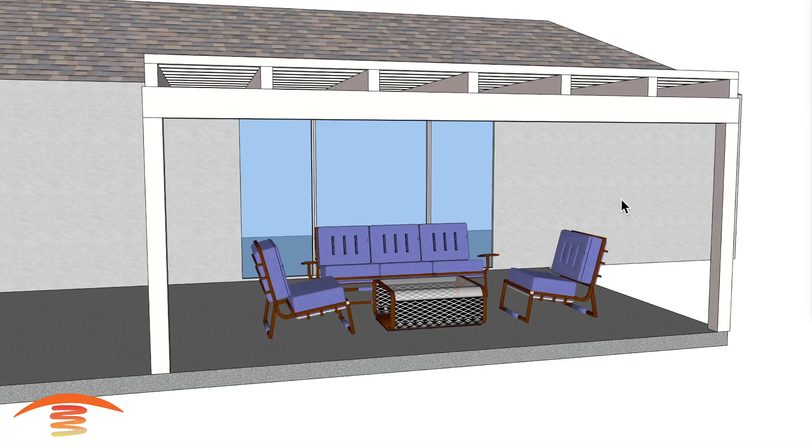Now let's get heating. All right, so here we have this residential patio with the covered deck area here. Let's go right into the overall dimensions. So overall dimensions, I have at inside edge to inside edge of post, 18 feet.

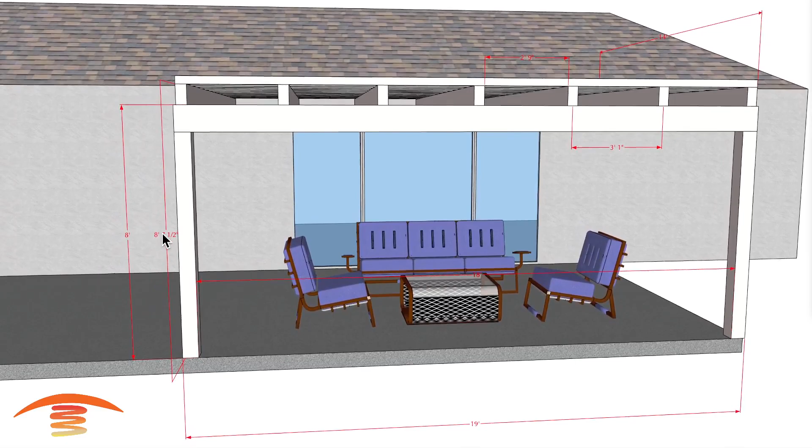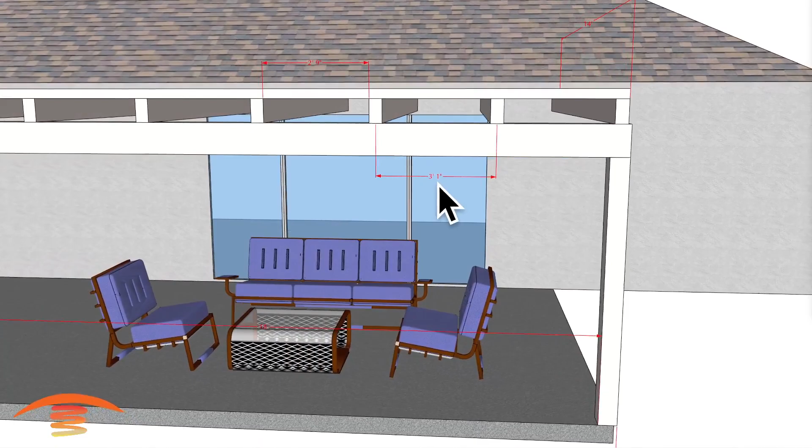I have a height of the beam going across here at 8 feet off the finished floor, and then the top edge of these cross beams at 8 foot 7.5. I have 33 inches of space between these beams, or 2 foot 9 inches, and we have a 14-foot depth of the patio structure itself from here to the residence structure, and then 3 feet 1 inch center to center on these cross beams.

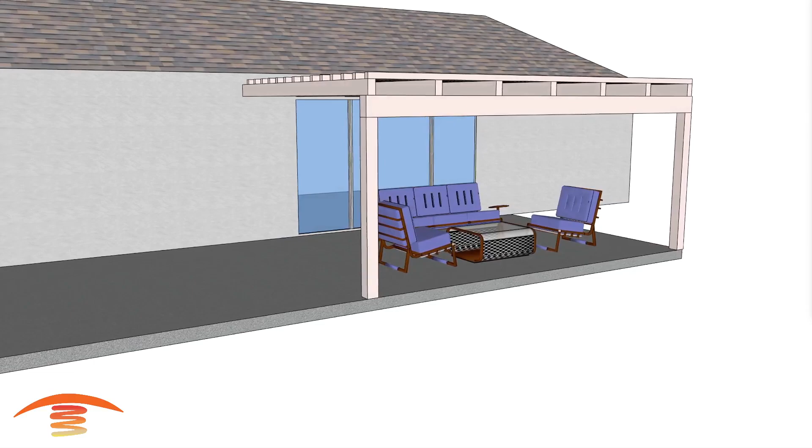I think that's about it as far as the details are concerned. So let's go into a couple of the recommendations that I might have. I'm going to first show you using two SlimLine 4,000 watt units mounted between the beams, and these are pointed straight down to the ground.

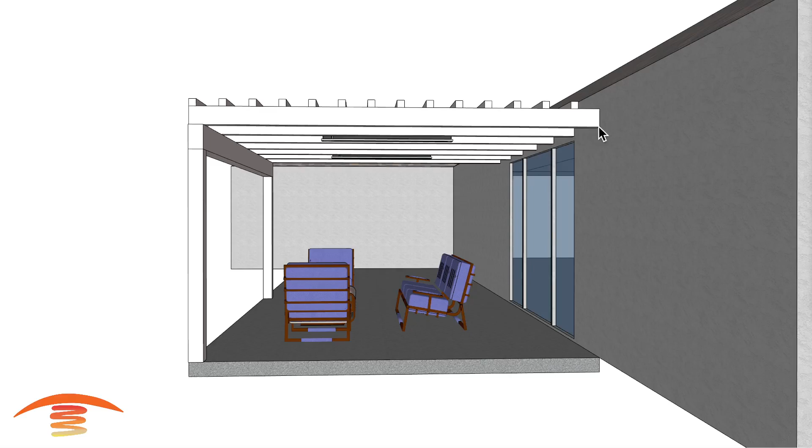So they are centered within the patio structure from this point here to this point here, and pointed straight down to the ground. Now the distance apart from each other, I'm going to show this, it's going to have some more information, but let's go ahead and put that on here. So the distance I have is 9 feet 3 inches center to center on the brackets.

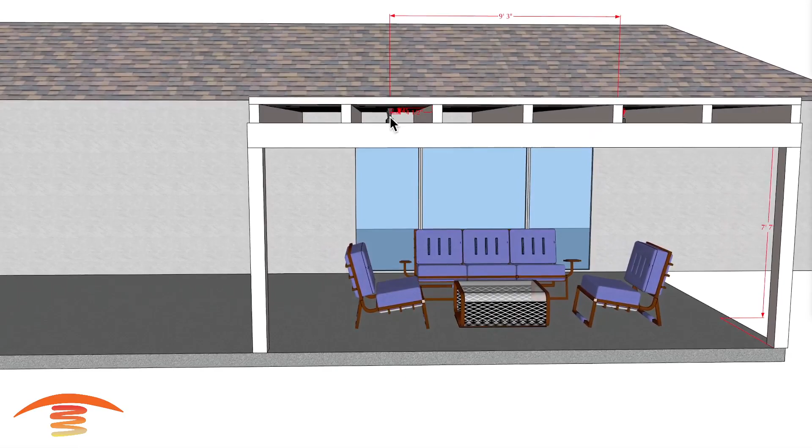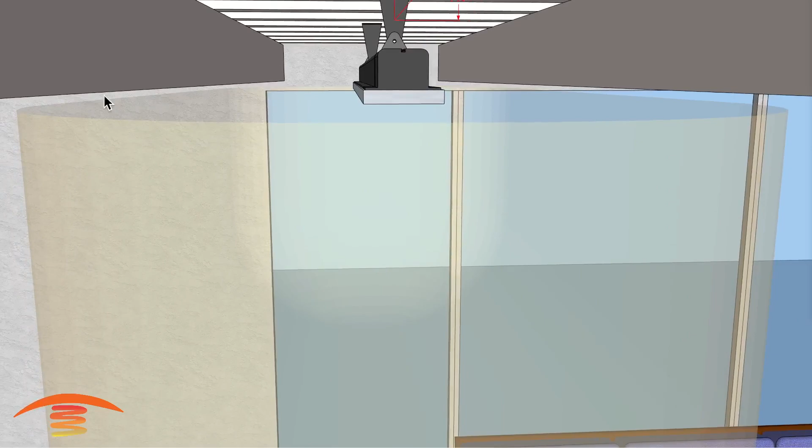And let's go ahead and look at the clearances first of all. So clearances below the heater, you must have 18 inches of clearance below the heater. With the OEM mounting brackets and pointed straight down to the ground, you do meet those clearances to the left and right of the heater itself. And then there is an above clearance that is met at 6 inches out, and there's no problem with regards to that. So that's why I would probably mount the heaters something like this, just to give it a more visual appearance.

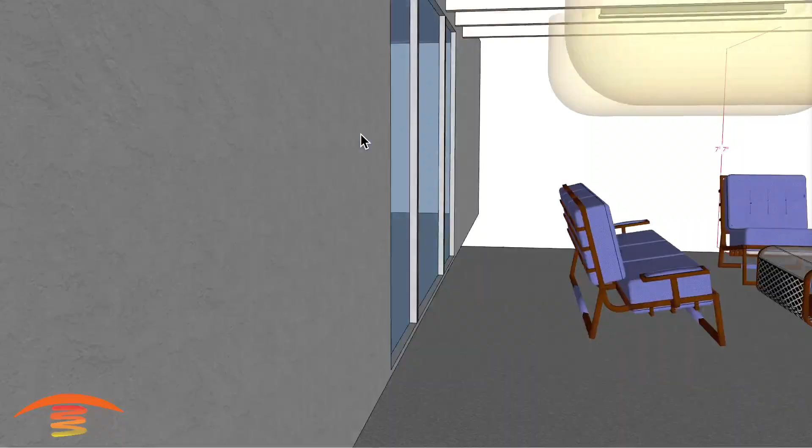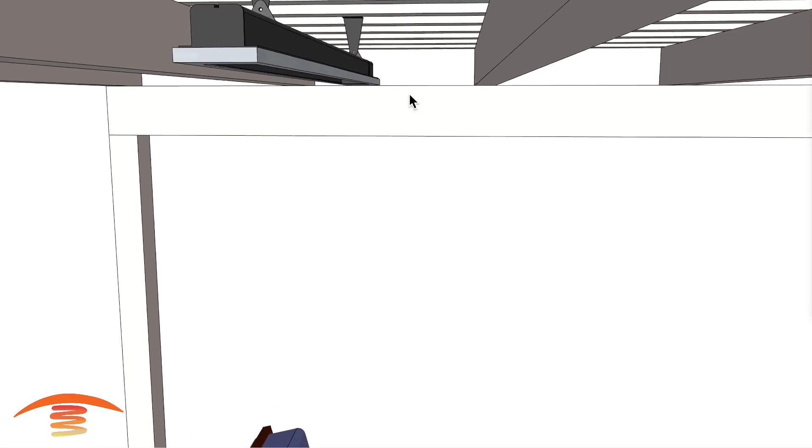Sorry about that. But let's see if we can see it this way here. In any case, it would line up fairly decently. We're going to turn off the clearances here so you can see that, and I'll turn off this distance.

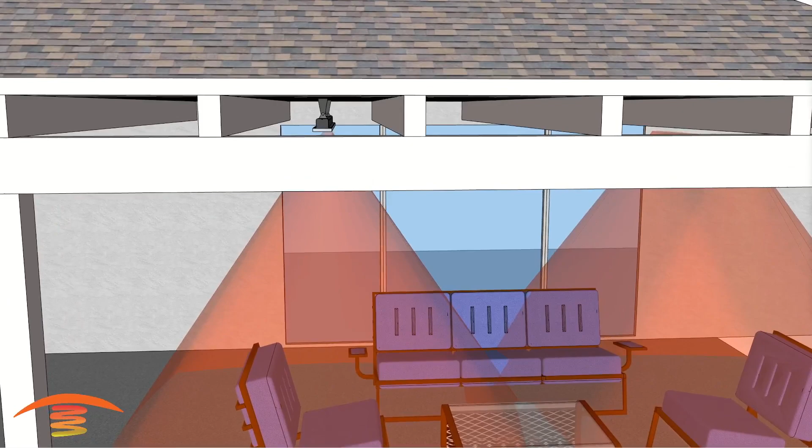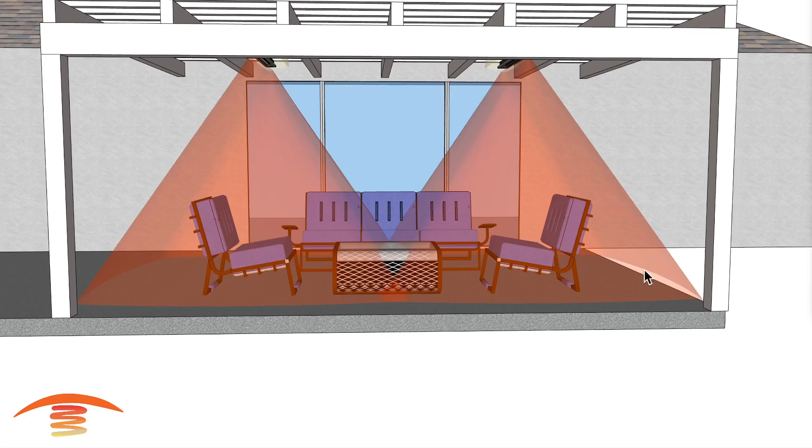But yeah, you can see that it's going to be less visual in this aspect. So in any case, let's go ahead and look at the footprint of heat. Now the footprint of heat, you can see because of the distance apart from each other, and we could actually move them a little bit closer. So again, the clearances above the heater, we could move it so that it's closer to this edge here and this one closer to the edge over here, and I'll show that just in 1 minute.

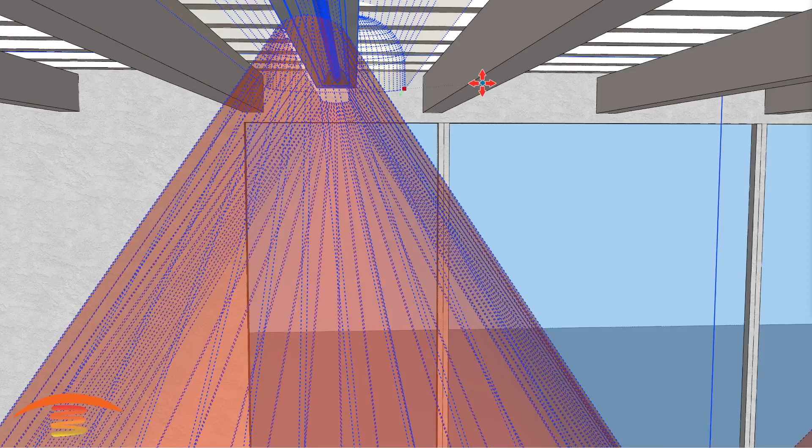But in any case, you can see that we are getting a good footprint of heat. However, we're missing the center position here. So let's go ahead and move this over. I'm going to go ahead and turn on the... see if I could do that here, and we're going to move this from this point here right over to the edge of the structure here. So we're still within that 6 inches of clearance, and we're going to go ahead and move this one here over as well.

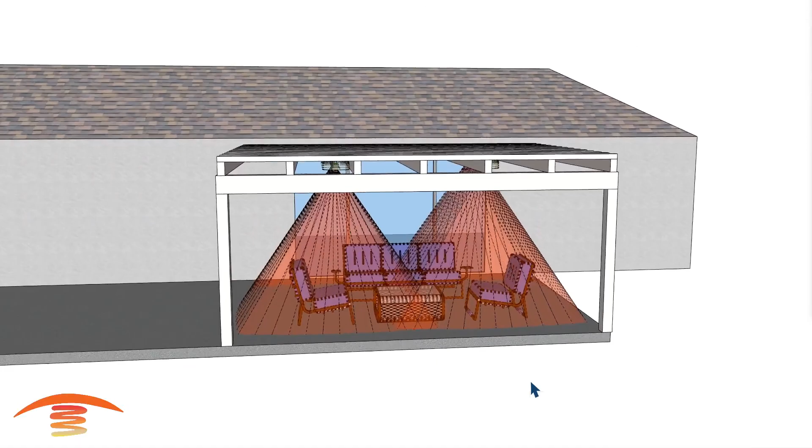And see how that footprint of heat actually is. So that's right up against the edge there, and now you can see that the footprint of heat is a little bit better. Let me go ahead and turn that off now. But we're still missing a little bit of here.

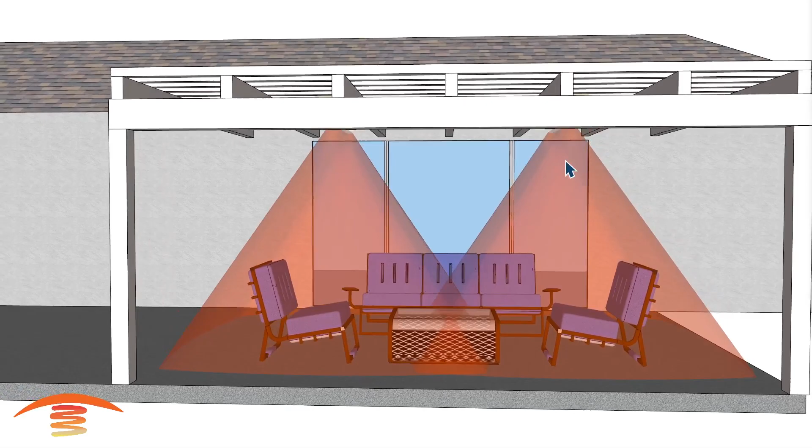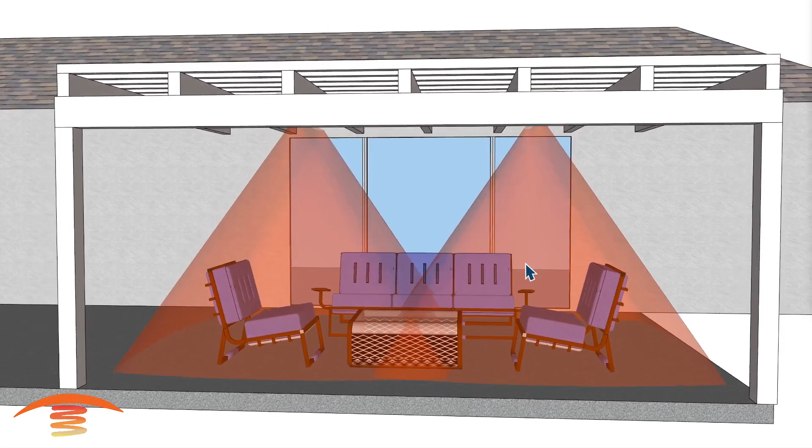Now this is infrared light wave. Infrared light waves are not visible to the human eye, and as they travel, they stretch and bend as they travel away from the heater itself. So there will be some rays here that you can feel, and because there's overlapping, this might be just fine.

But I would, if I was going to place the heaters straight down to the ground, this is how I would do it. At closest to this beam as I can go, that's 6 inches of clearance, and I think that would be just fine.

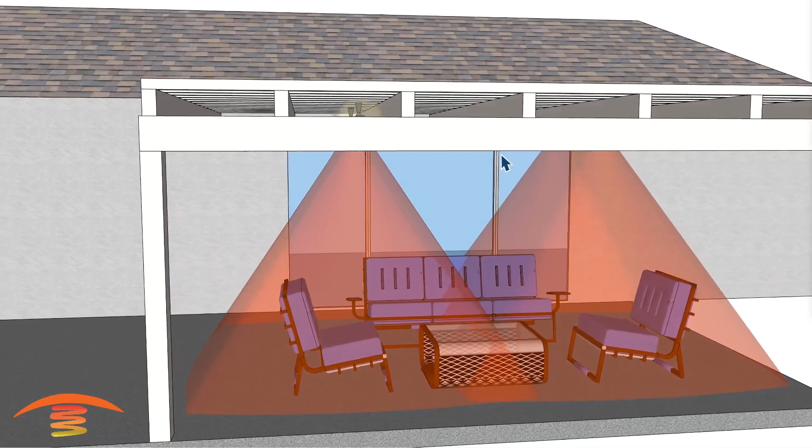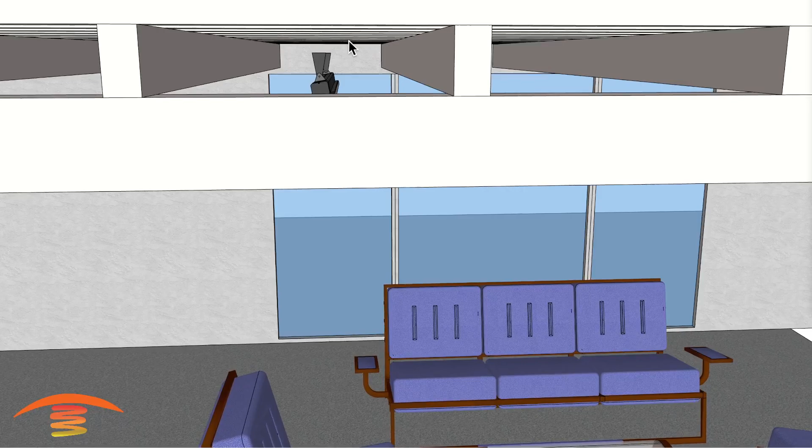Now we're going to turn that off and look at another possible solution, which would be to utilize the same unit, the 4000 SlimLine unit. But you can see here this one is not bolted up to the cross beams, I had to drop it down because I changed this angle to 10 degrees, pointed in, so I have a little bit more overlapping.

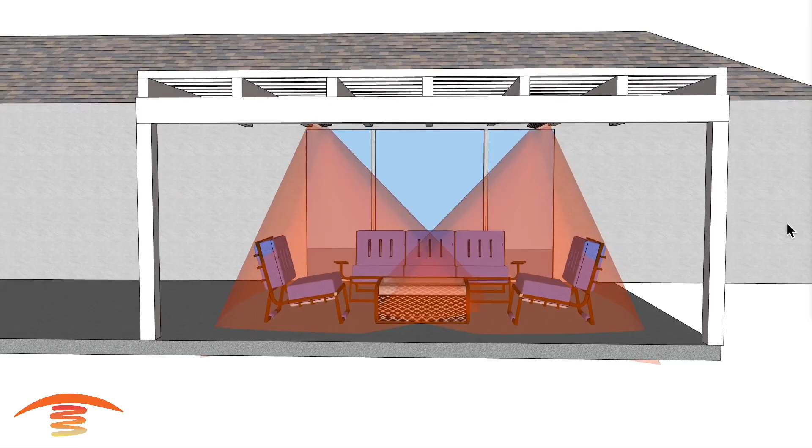Let's go ahead and look at that overlapping here. You can see that the overlapping is much better in regards to that 10 degree tilt.

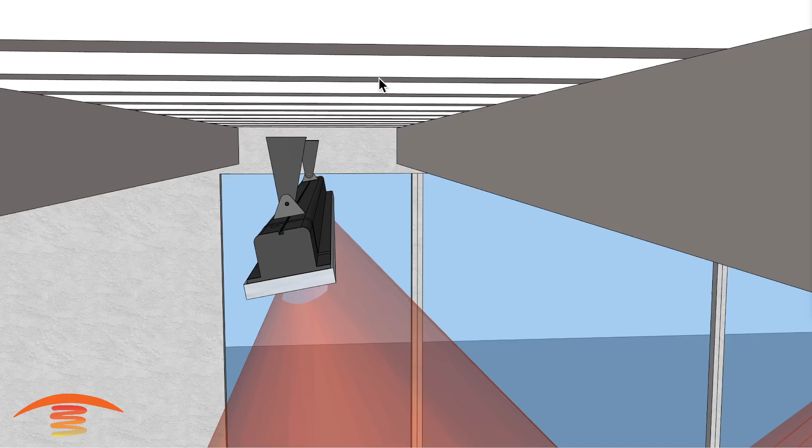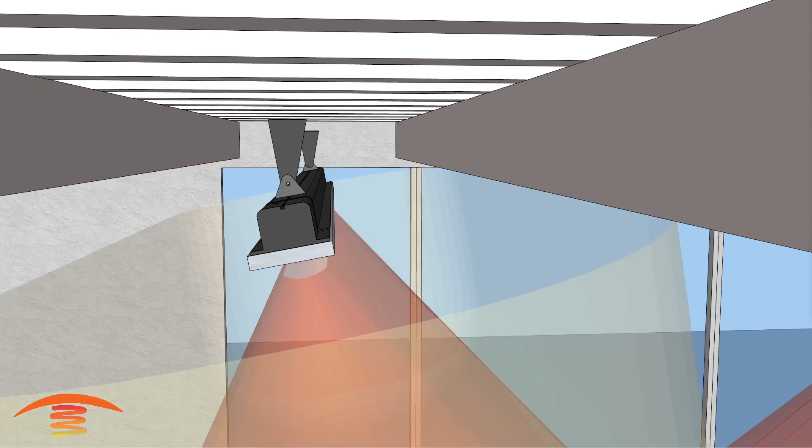Now this heater here I have at a drop of 2 and 3/4 of an inch from the bottom edge of these, I'll call them lattice pieces, so that I can still get my clearances below the heater. Now in order to do that, you're going to have to put in a block or something of that nature in order to make that attachment at that 2 and 3/4 of an inch.

However, if you were to use the OEM brackets that the manufacturer makes, they do make an extended bracket that is 4 inches longer. They make a 2 inch longer, a 4 inch longer, and a 6 inch longer. So I'm choosing that 4 inch longer bracket.

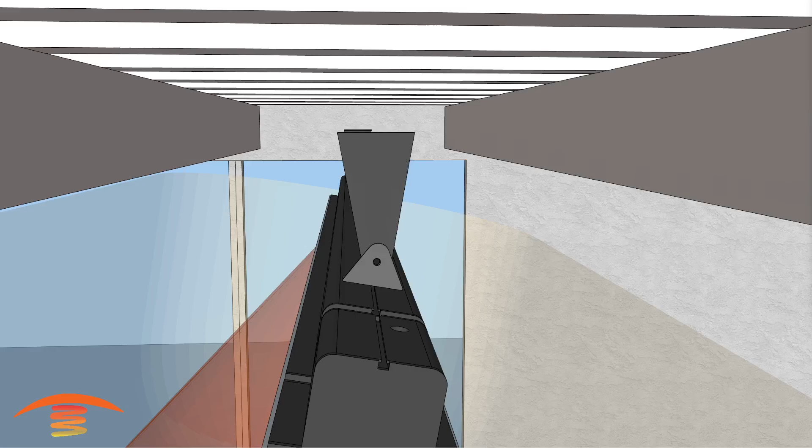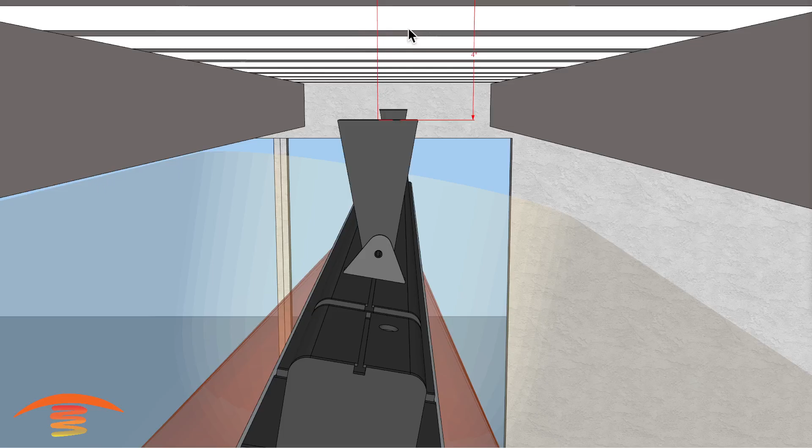I think I have this on here. You can see this is 4 inches from the lattice pieces here, and that would work without putting a block in here. You can see that my clearances are met with that 10 degree tilt towards the center. And over here you can see this one is at 2 and 3/4, and we're still meeting that clearance at that edge, just right on the number there.

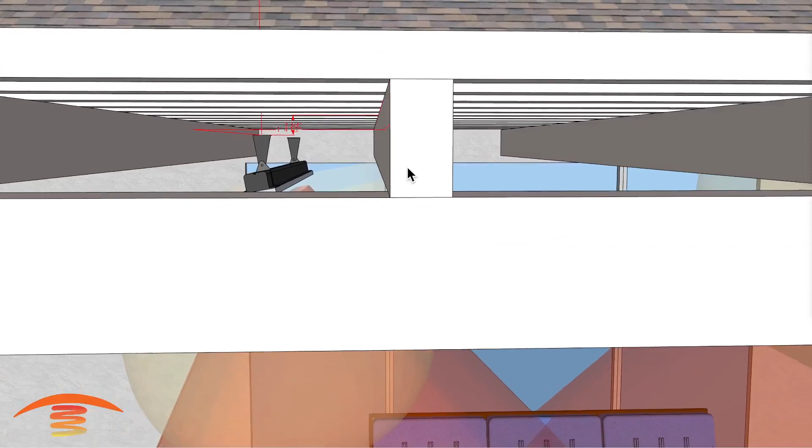So in any case, it depends on how you would want to do that as far as that block is concerned. And the other thing I'm going to mention too is that the SlimLine units have these brackets that slide left to right along the top channel piece here.

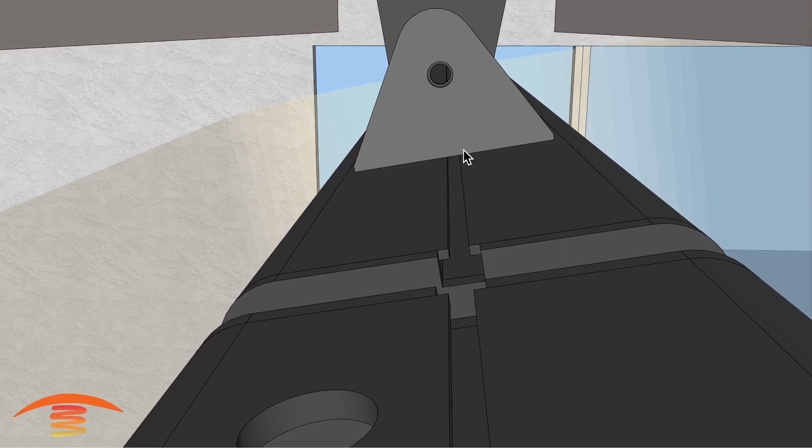It has a bolt that goes through here, or I should say a nut that goes through here and a bolt that goes into that nut, so that you can line up your brackets to whatever it is that you need to attach it to. So this could slide to the right and this one could slide to the left, so you can match it up exactly where you want it and get it into that perfect alignment left to right, centered point.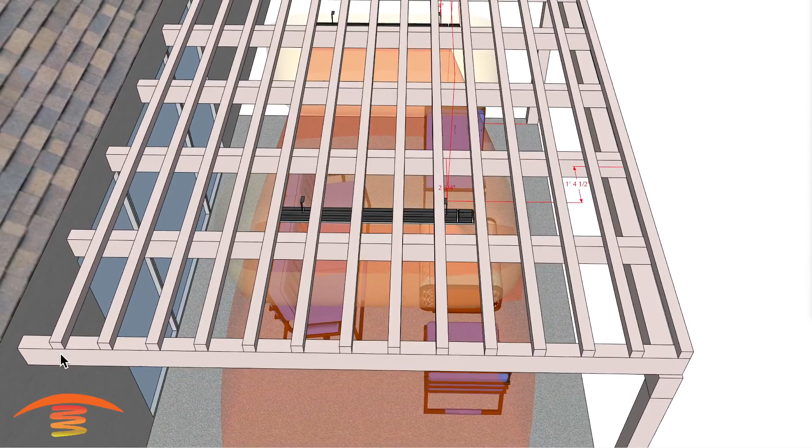So again, I'm going to go ahead and turn off the clearances. This is the footprint of heat at a 10 degree tilt, and again this one's just slightly lower than this one here by an inch and a quarter of an inch.

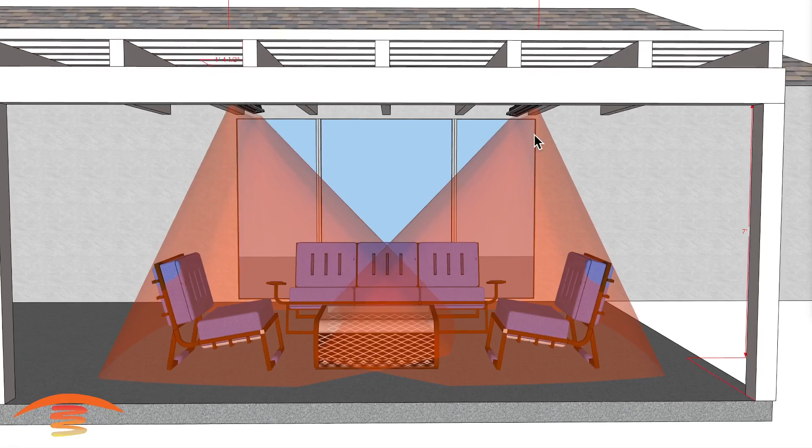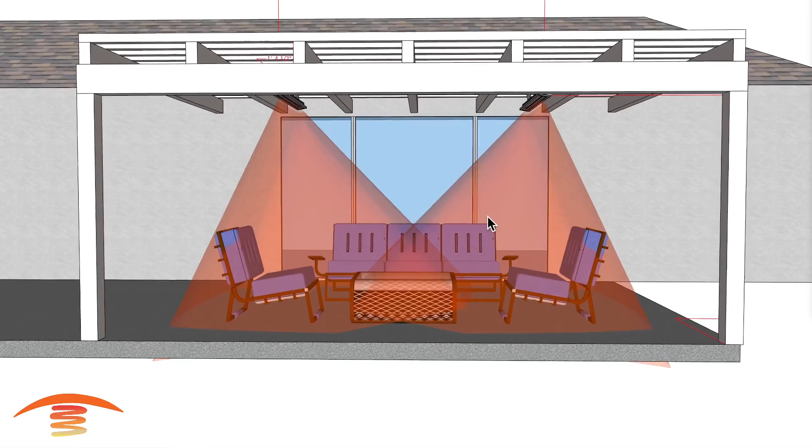So I think that is about it. Here's the distance, 9 feet 3 inches center to center on the brackets themselves, and this would be probably my preferred application if this was my residence. I like to have the heaters centered within that span here, as well as at that angle, so that I can get that nice coverage here.

All right, well, I hope this has helped. If you're looking for some assistance with your outdoor heating application and you would like us to review your plans, send your information into